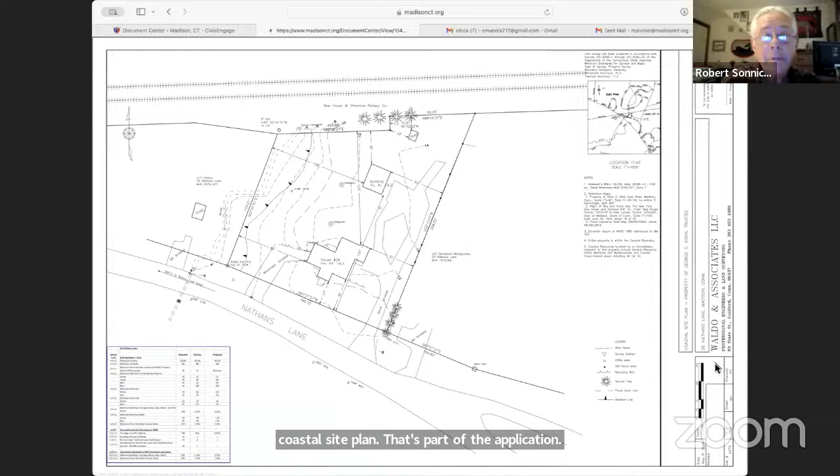The zoning chart that we prepared appears on the coastal site plan that's part of the application, down in the left-hand corner. The property complies with all of the bulk standards for the planned residential development in the T district.

Including coverages, minimum lot area, minimum lot width, minimum side yards. The only exception to that is an 80 square foot shed, which is located near the railroad tracks at the rear of the property.

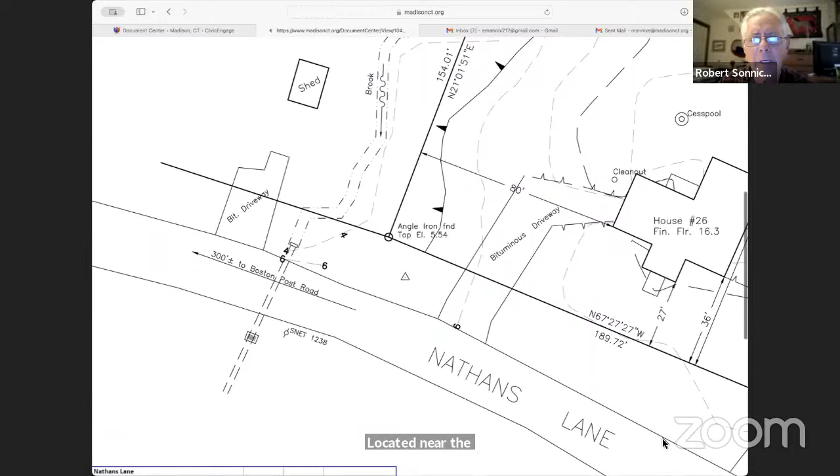You could bring it up to the top. There's the shed. It doesn't meet the side yard or the rear yard setback, and the only activity proposed as part of this application would be removal of that shed, or relocation of that shed to a location outside of the setback distances.

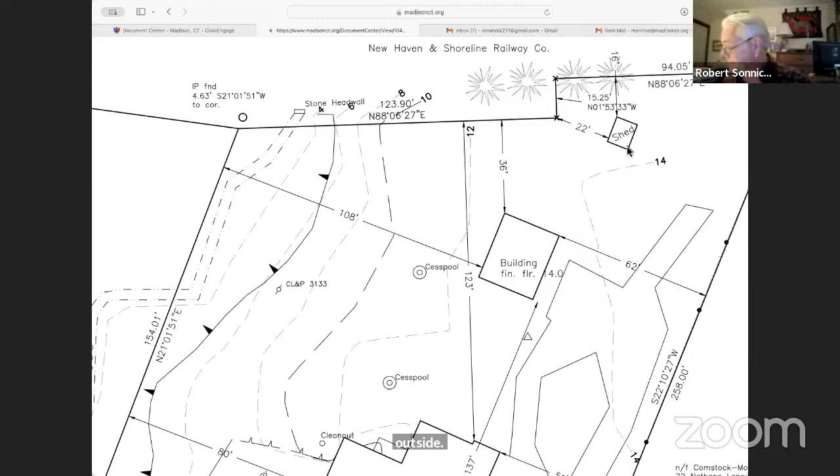The Madison Tax Assessor's records indicate that the main building on the property contains 2 dwelling units with a total of 3 bedrooms. It's actually 2 bedrooms. One of the dwellings, in the front section of the house, has 2 bedrooms, but one of them doesn't meet the bedroom standard, so it's considered to be a 1-bedroom dwelling. The other one is a 2-bedroom dwelling, and it has a large open area upstairs which doesn't comply with the bedroom standards either. So the main house currently has 2 dwelling units in it.

The tax assessor's records also indicate that the second building on the property, which is a barn built in 1930, located in the back part of the property, contains 1 dwelling unit with 1 bedroom and 621 square feet of living area.

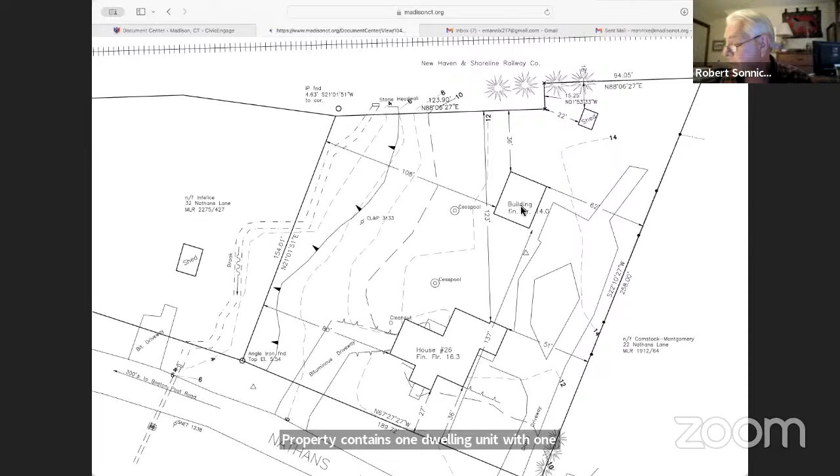That 621 square foot area on the first floor was converted to a dwelling unit in the mid-60s. As a matter of fact, it was converted by my grandfather after my grandmother passed away. His youngest son had to come back to Connecticut because of health reasons from Alaska, and he wanted to give the portion of the house he was currently living in to his son. So he endeavored to build the one-bedroom apartment, where he lived for a couple of years on the site.

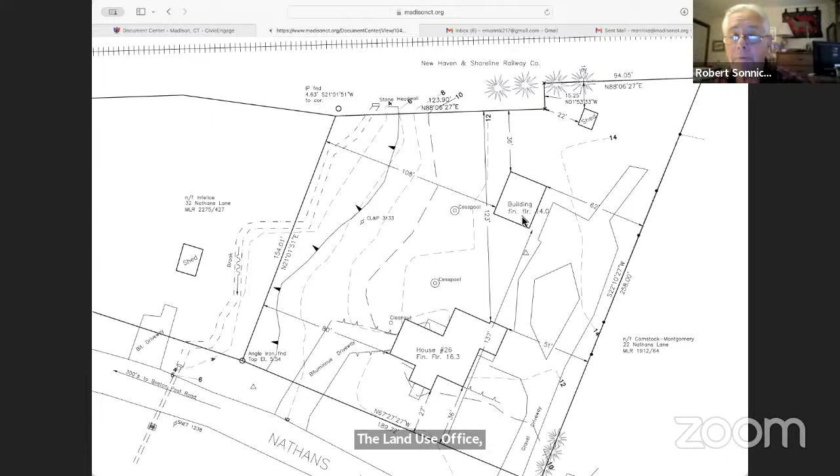At the time that the current property owner wanted to put this property on the market, the land use office reviewed the land records and could not find any record of the portion of the barn being converted to a dwelling unit, and determined that the total number of dwelling units on the site would be limited to two, the two existing dwelling units in the main house.

That determination resulted in our preparing the special exception permit to establish a planned residential development on the property, which will allow the continued use of the dwelling unit in the barn at 26 Nathans Lane. So that's the essence of this application. We meet all the requirements for a planned residential development in the T-zone. It's going to reestablish the barn as a dwelling unit, which has been continuously occupied for many years as a one-bedroom apartment unit.

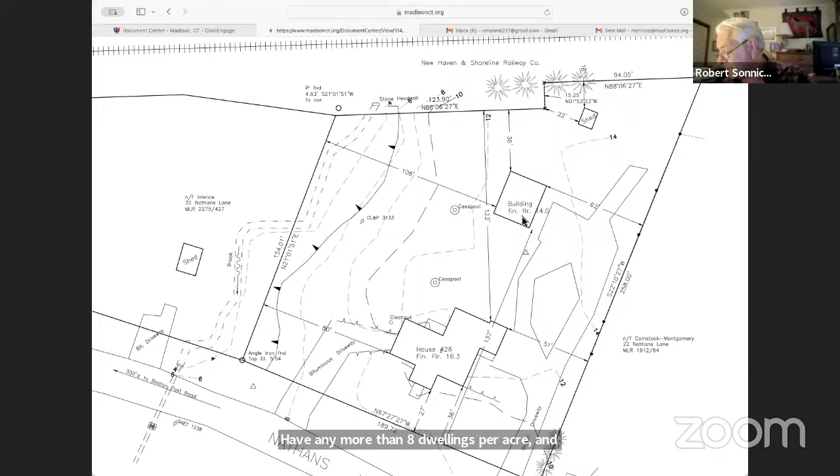Once again, we meet all of the standards for a planned residential development in a T-zone. There can be up to 8 dwelling units per building, and we're proposing 2. There can be no more than 3 bedrooms per dwelling unit, and we're proposing 2. The average density shall not exceed 8 dwellings per acre, and we're providing 2. The bulk standards are also met: the maximum building coverage is less than the 20% allowed, and the maximum floor area ratio is significantly below the 30% that's allowed. We also prepared, since it's in the coastal area, a coastal site plan and a CAM application for the project.

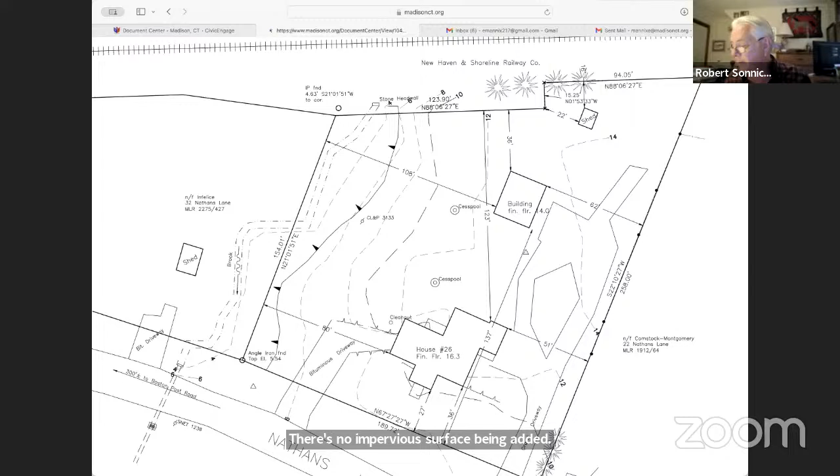The resources that exist on the site are general coastal resources. Anywhere in the coastal area is identified as a general coastal resource. The project complies and will have no effect on the coastal resources on or near the property. There's no impervious surface being added, so in our opinion, we completely meet the coastal resource policy direction.

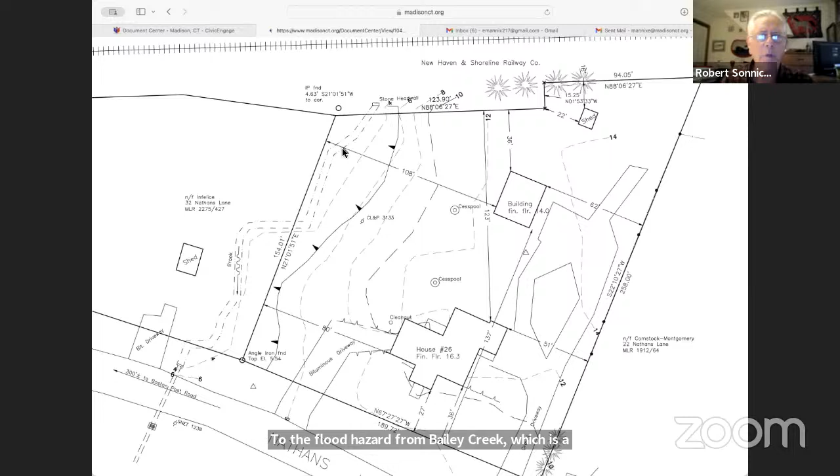The coastal hazard area is also on site. There's the flood hazard from Bailey Creek, a freshwater watercourse which runs along the west property boundary and has an inland wetland fringe along it, shown on the plan.

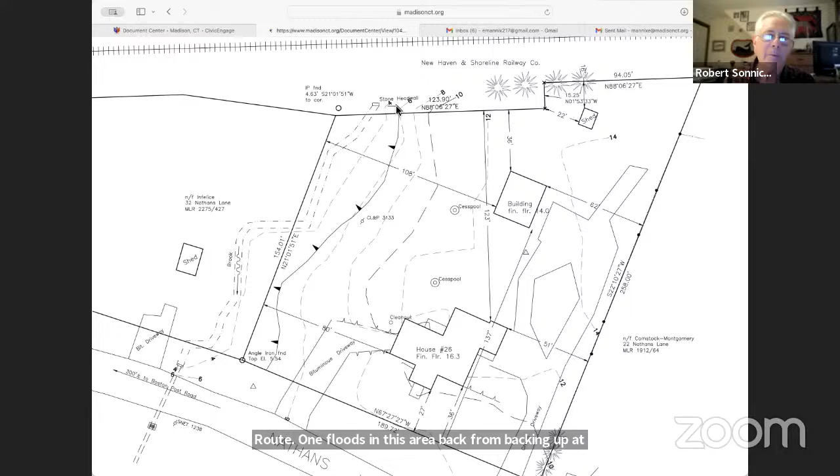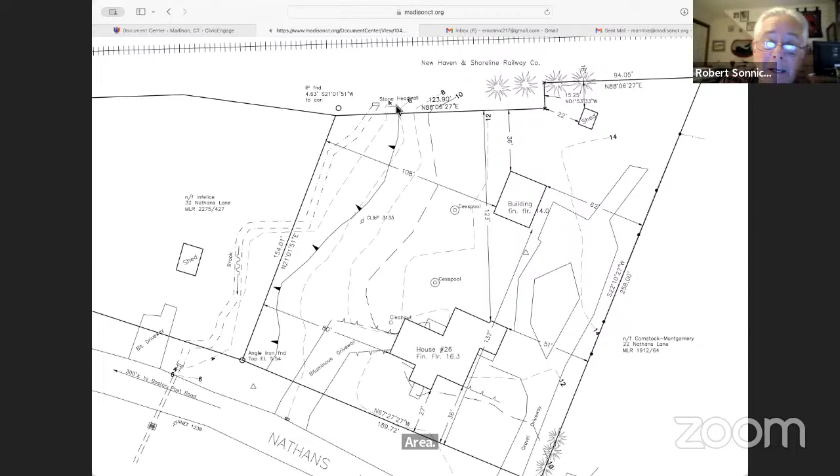Bailey Creek does, well, Route 1 floods in this area backing up at Bailey Creek near the railroad bridge. It always has. It's gotten worse since the property across Nathan's Lane put the brook in a culvert many years ago. But the flood insurance map does show the flood hazard area, shown as a dashed line running through the center of the property and just touching the corner of the house.

It does include coastal hazard, but we're consistent with the policy because we're not increasing impervious surface. We're not making any changes, and we'll have no impact on the coastal hazard boundary.

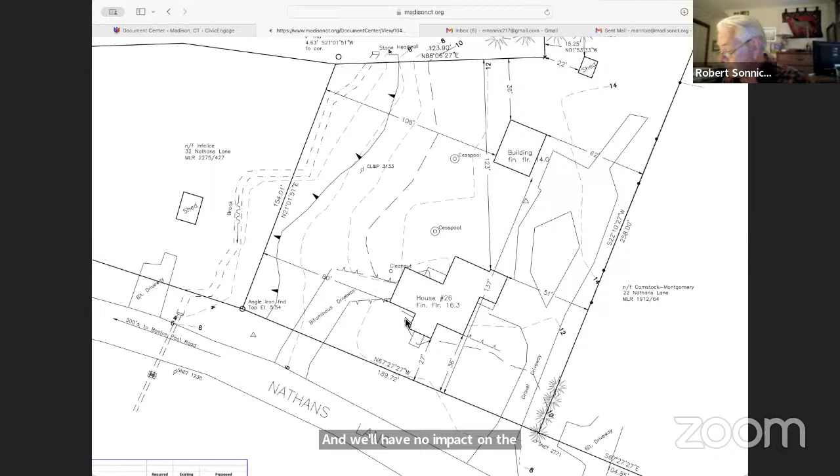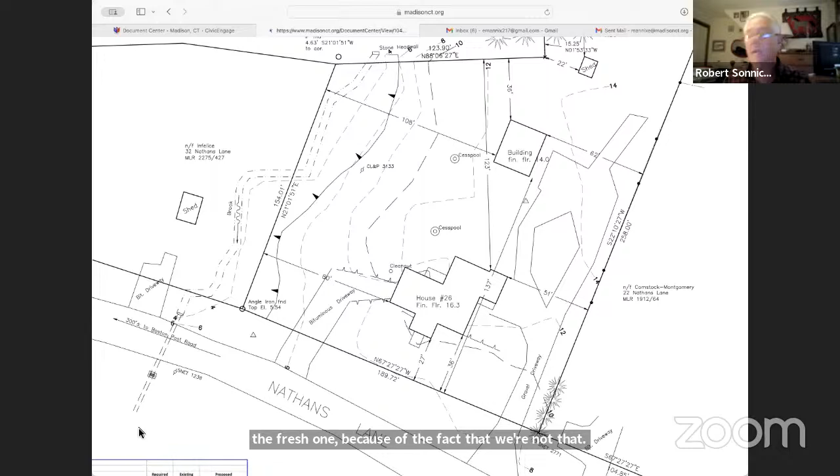The other resources are tidal wetlands, located off-site. The nearest tidal wetlands are on the south side of Route 1. Bailey Creek does discharge into the tidal wetland area, but because we're not proposing any activity on the site, it won't impact stormwater runoff or the tidal wetland resource in any way. There's also a freshwater policy, and we meet the requirements of that in protecting that resource because there's literally no change in the site plan.

The grass area is going to remain as it is, no expansion of the buildings, simply a reuse of the prior existing occupancy of the site.

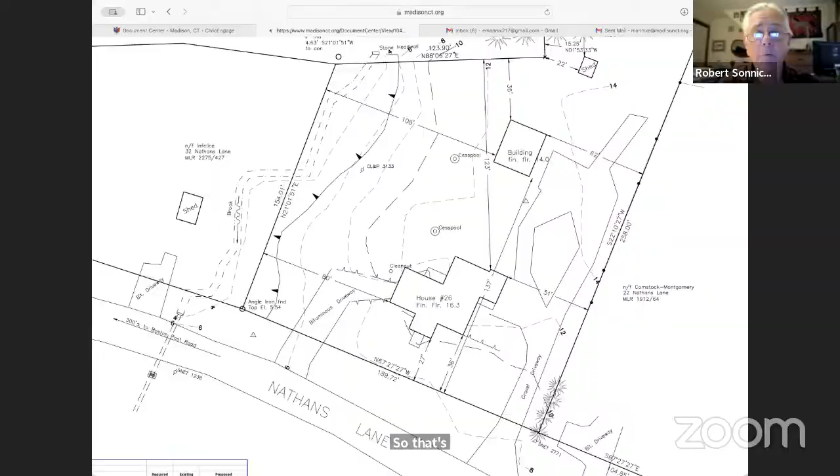So that's a summary of my presentation with regard to this application. I'm hoping that you'll agree that this is a good way to resolve an open issue with this property that was discovered not very long ago. I think the best way to handle it is to follow this course and ask for approval of a planned residential development at 26 Nathan's Lane. I'd be happy to answer any questions you may have.

Hopefully you will look favorably upon the application.

Thank you. Are there any questions from commissioners? Yeah, I have one. Bob Reinhardt.

I'm just trying to follow along on the storyline. It sounds like in the tax assessor's office, both housing units are included, but elsewhere there's no indication that the barn was ever converted to a one-bedroom apartment, essentially. Is there any need for us to look at the need for a CO for that property if we do that? I'm unsure of what our responsibility is—converting it to a planned residential development is fine, but was the barn ever officially established as a livable property? Do we have any responsibility for looking into that?

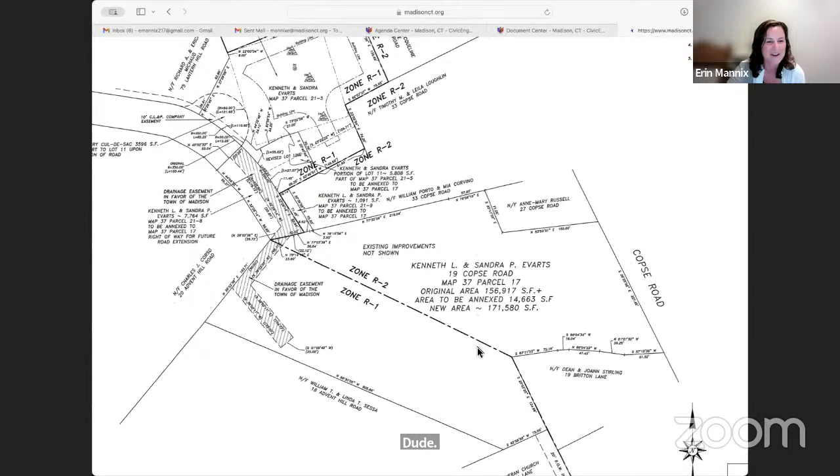Okay, you could walk us through this, Todd. There's a lot of lines. Okay, so Erin, if you could put the cursor up above where it says zone R1 on the lot there—nope, down to the next one down. Yep, right there. That dashed line was the original revision that we had proposed. And I went and staked that line, and there's a hunk of ledge right in the middle there. And he goes, well, I don't own goats, I own horses, and a horse isn't going to get over the other side of the ledge.

So I said, well, there's another option. I can take the upland area over here near the road and swap it out for that hunk of ledge. So the lot gets the hunk of ledge that the horse can't get to, and the horse gets the level area up on top there.

Sounds good. That is the revised line where Erin's cursor just was. Thank you. This one.

Well, you're in the road now—yes, go to the right, go to the right. That one there, that's the revised line. It gives him a little bit more access off of the road to get to his gate that's in the existing fence, maintaining the existing fence for about 20 or 30 feet, I think it was. And then he's going to have to relocate the fence for his horse to have his little pasture land there.

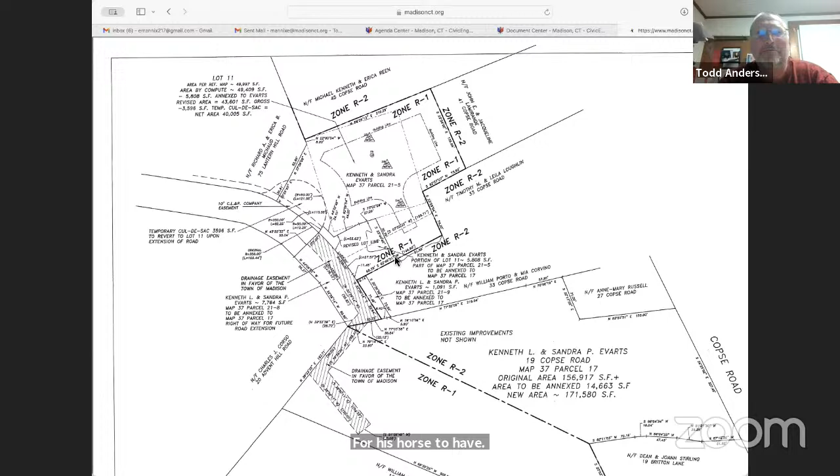Thank you. Any questions from any commissioners? One dumb question—so the applicant owns all of this property, is that correct? Yes. Okay, thank you. Yeah, he's looking at potentially selling the building lot.

Building. Okay. Without the horses. Without the horses, yes. Horses not for sale.

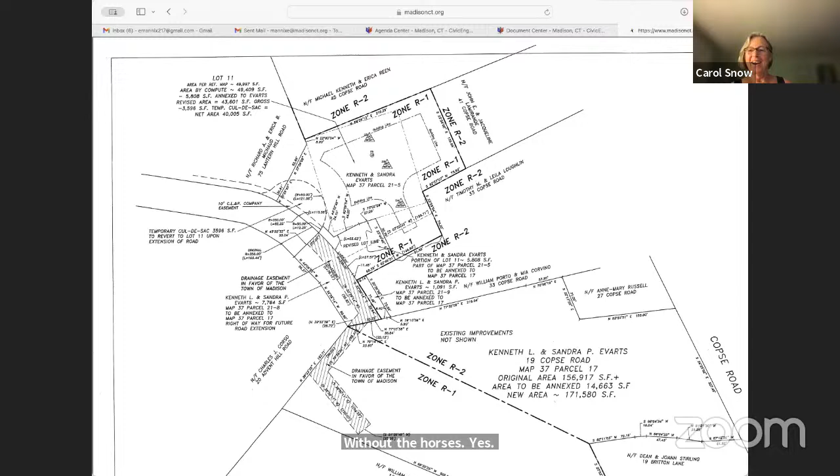Okay, if there are no further questions—Erin, did you want to add any other staff comments? Nope. We do have a draft resolution, if someone could read that as a motion to approve. I can pull that up for you.

I'll do the resolution. Okay, Mike?

Voted that the Madison Planning and Zoning Commission approve application number 24-24, 85 Lantern Hill Road, map 37, lot 21-5, zone R1, owner Kenneth and Sandra Evarts, applicant Todd K. Anderson, lot line revision as shown on the above referenced map with the following condition. Applicant shall provide zoning enforcement officer with a copy of Health Department 19-13-B100A approval prior to filing of Mylar. Effective date of this approval shall be August 1st, 2024, and upon filing of signed Mylar on the land records.

Thank you, Mike. Could I have a second? A second. Was that Jeff? I didn't. Yes. Okay, great. Thanks. Any further discussion? All in favor? Looks unanimous. Great. Thank you.

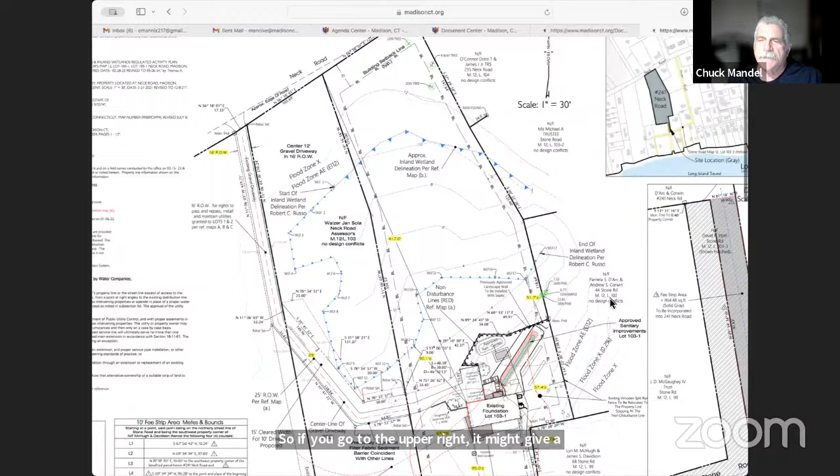Erin, if you don't mind putting the map on. This is a convoluted story. So if you go to the upper right, it might give a better sense of things so the commission can see the tax map. So 241 Neck Road is a lot that was created by Criscola and Shepherd in 2014.

So we are trying to get water is the impetus for this whole thing. So there's a major wetland pocket. So if you look at the larger map, you can see along Neck Road, those little blue triangles, that's all wetlands. So originally we tried to get water to come from the existing right-of-way to the existing foundation that they're in the process of building right now.

Connecticut Water has to adhere to PURA regulations, and regulation Title 16, 1611-64 concerning water service, is the water company is not allowed to go through two properties. They can grant an easement through one property, but they cannot grant easements through two properties. So there's the existing driveway, and then it goes off to the south. That little angle point, that's a second property. So Connecticut Water would not allow us to run a line through the existing right-of-way and driveway.

Subsequently, we went to the Inland Wetlands Commission, and we attempted to get approvals to go through a major water area. It was a high-value wetlands, environmentally sensitive.

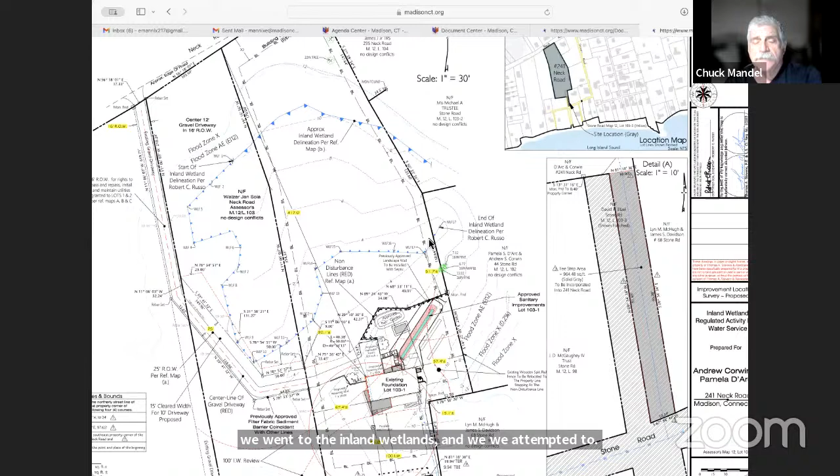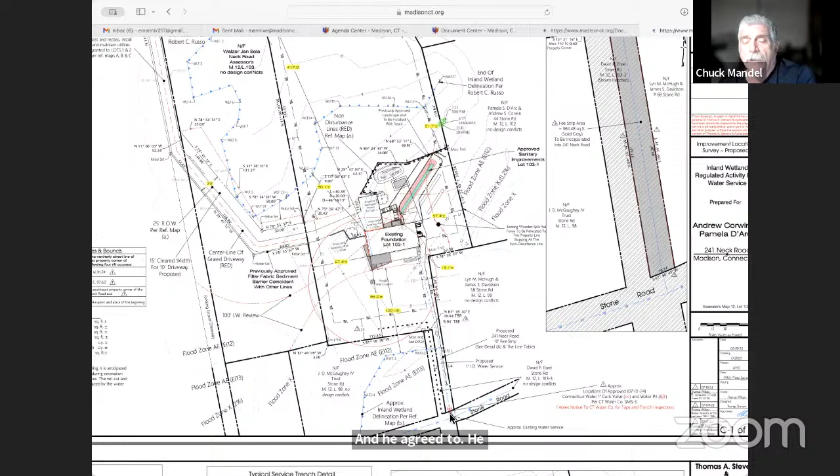Subsequently, the owner of the lot to the west of us, David Etzel, approached us and said, would you like to come off of Stone Road? Well, there's a water main that runs down Stone Road. So that would be one easement area. And he agreed to, he spoke with Andrew Corwin, my client, and he was willing to sell a 10-foot strip of a 20-foot right-of-way that runs up along that line.

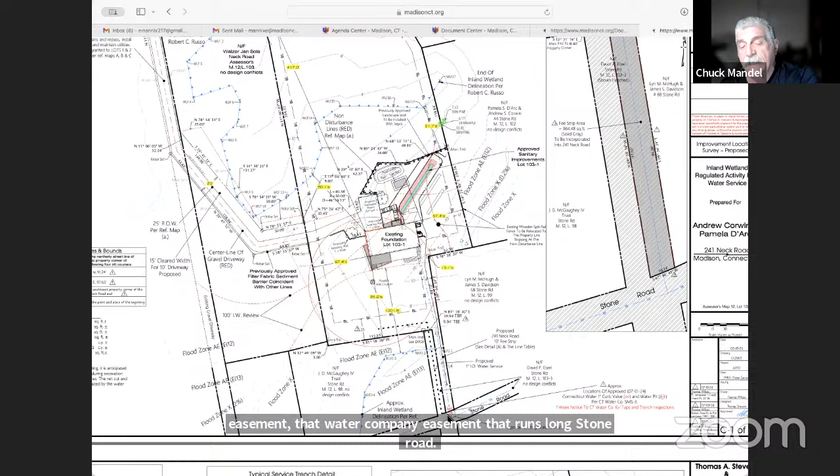So David Etzel owns all of Stone Road. There's an existing easement, a water company easement that runs along Stone Road. But we could not go through a secondary easement through that 20-foot strip. So he offered to sell Andrew Corwin that piece of property for $1 and to donate $10,000 to the Madison Land Trust. I did have a conversation with David Roach today, and he said the land trust would be willing to take that donation. So that was not an issue.

And that is essentially it. So that little 10-foot strip is wide enough. We had discussions with Connecticut Water. They tentatively approved us going through there with a 1-inch water line.

It's still wetlands. We had a soil scientist out there, Bob Russo, go out there. It's all Phragmites. It was totally choked in invasives. There was no remediation that was possible. It had no value in regards to wetlands. We did go get wetlands approval through there, and now we're here for approval from the Planning and Zoning Commission

to append this 10-foot section to Andrew Corwin's lot. Erin brought to my attention that we needed the B100A. I wasn't aware that we would need a B100A for Stone Road, since it's not really a lot. But I did contact Amanda. We did the application, and she was kind enough to give us approvals for both lots, Andrew Corwin's and Stone Road. And that should be, I believe she uploaded that as part of the record. So here we are, just looking to add that 10-foot strip to an existing building lot.

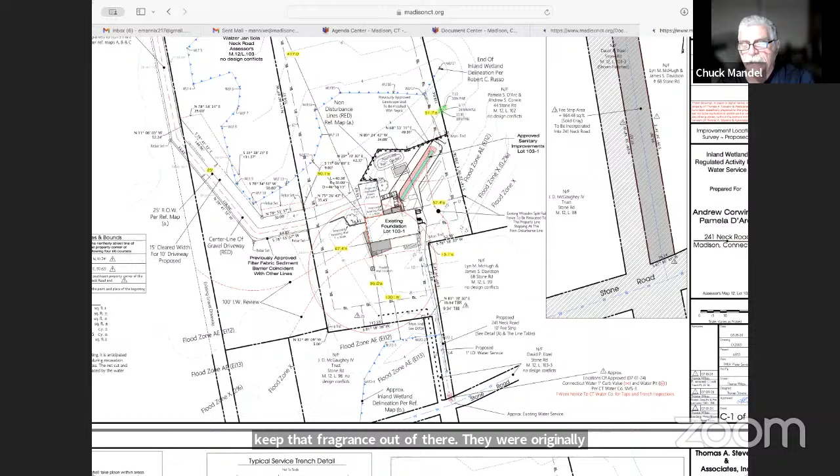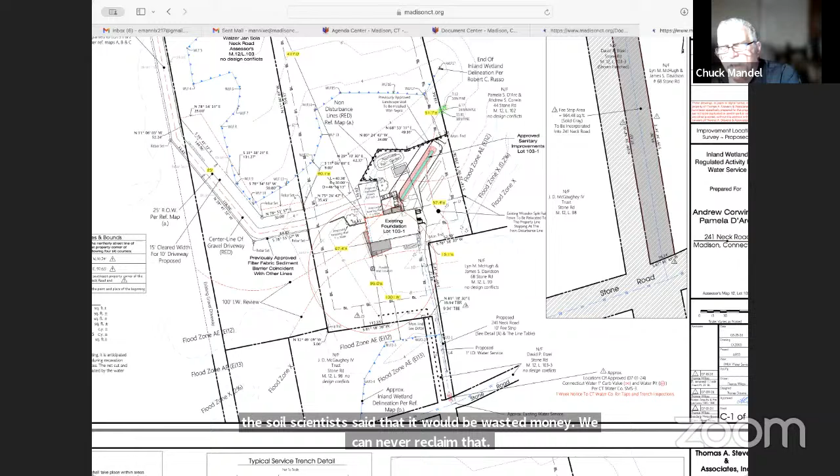Will you get rid of the Phragmites? Well, they're gonna go. The water line has to be 5 feet submerged, so it'll be cleared at the time, but there's no way we can keep that Phragmites out of there. Wetlands originally thought we could remediate it, but the soil scientist said it would be wasted money. We can never reclaim that. It was dry when we were there, but it's choked with Phragmites.

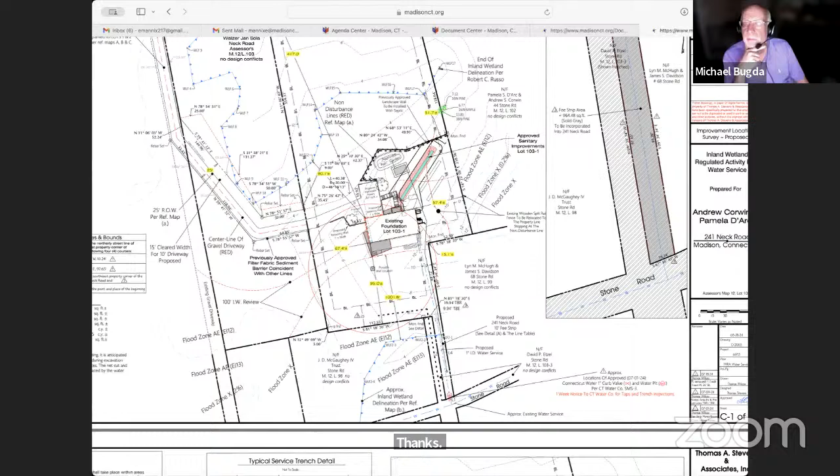Stone Road is privately owned? Yes, it's owned by David Etzel. If you look at the tax map, Michael, you can see he owns Stone Road, and the yellow area shows he owns several rights of way, one to the north and three to the south to the water.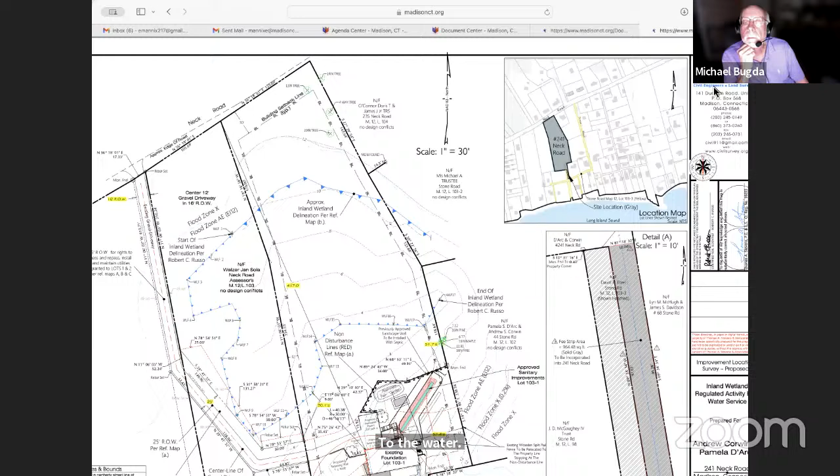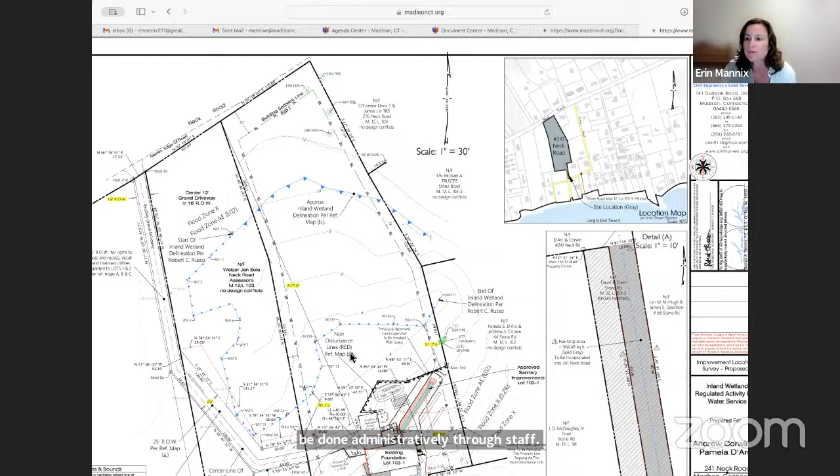Again, this is before you only because these lots were created via subdivision, and that's why these lot line revisions come before the commission. Our current subdivision regulations don't allow these modifications to be done administratively through staff—it requires approval by the commission. Interesting. Thanks, Erin.

Any other questions or staff comments? If not, we do have a draft resolution. Erin, can you pull it up? Andy or Jeff, would you like to take a shot at reading this? Yeah, sure, I'll do it. Thanks, Sandy, Andy.

Voted that the Madison Planning and Zoning Commission approve application number 24-25, 241 Neck Road, map 12, lots 103-1 and 103-3, zone R4, owner applicant Andrew Corwin and Pamela D'Arc, lot line revision as shown on the above referenced map, with the following condition: 1, applicant shall provide to the zoning enforcement officer a copy of Health Department 19-13-B100A approval prior to filing Mylar. Effective date of this approval shall be August 1st, 2024, and upon filing of signed Mylar on the land records.

Thank you. Could I have a second? Second. John Morgan, any further discussion? All in favor? And so approved. Thank you very much. See you on the 15th. Yes, you again—we hope so. Take care.